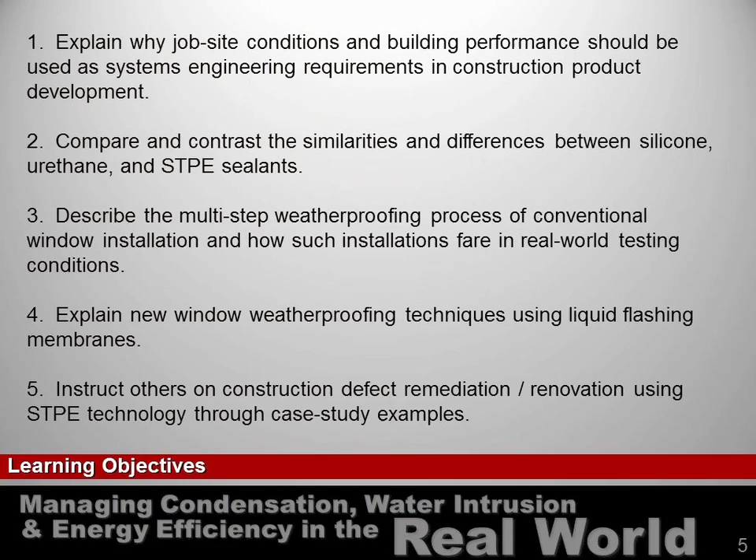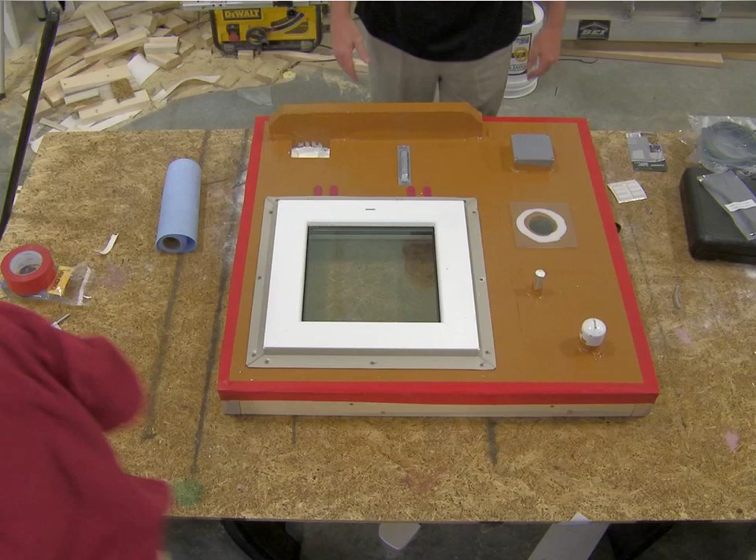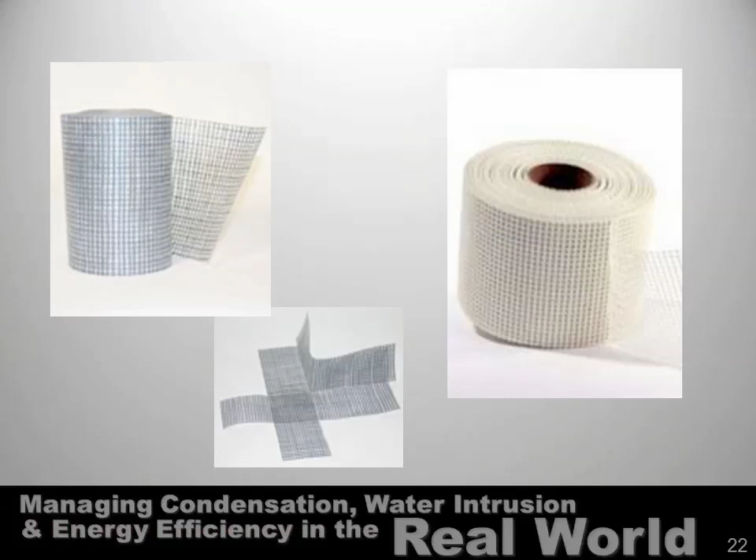As I was saying, the contractor in-house spreadable version has been in use since 2004. And by contractor in-house spreadable, I mean a contractor in the Pacific Northwest and now in the Southeast United States who for over 2 decades has made a good business as a self-performing general contractor, whole building repair specialist, repairing buildings that are 7, 6, 5, 4, 3 years old, slowly decladding them, repairing rotten OSB sheathing, repairing rotted rough opening, pulling windows, repairing the rough opening, reinstalling the windows, recladding the building.

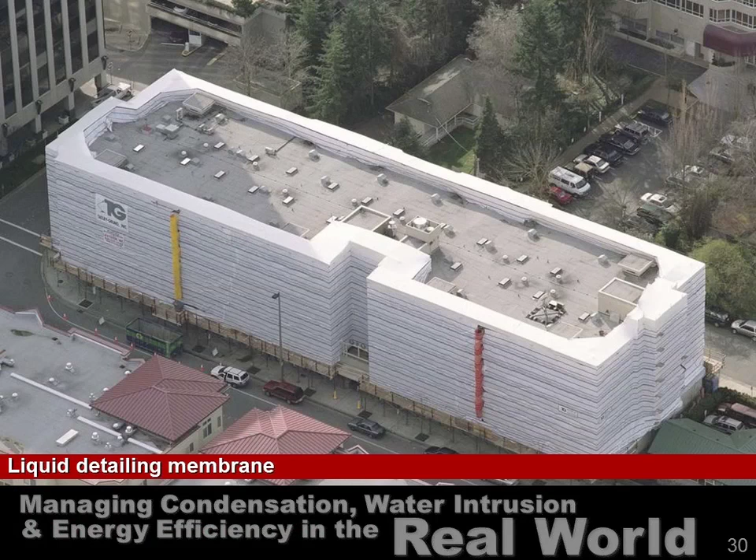And what they find when they pull the cladding typically is disintegrated building paper, corroded fasteners, decayed sheathing and structural members, and severely compromised peel and stick flashing membrane, there, as you see around the frame of that window.

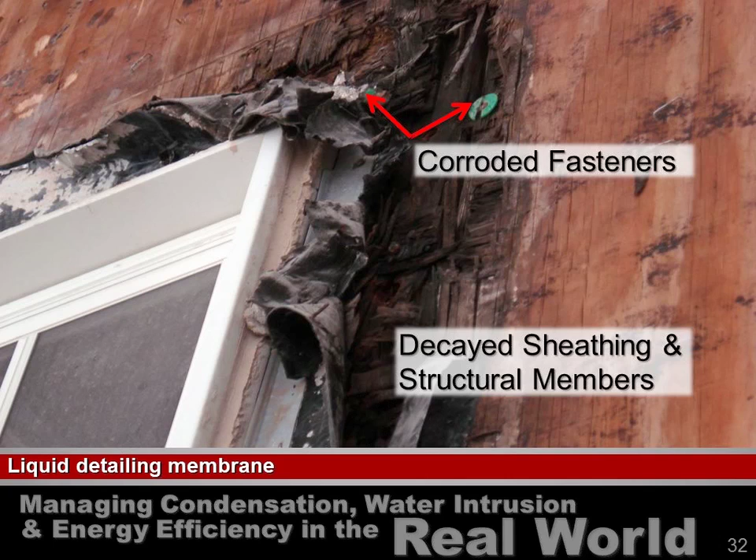After doing this for a couple of decades and testifying in over 85 lawsuits as expert witnesses as to the forensic causes of this damage, the remedial measures that would be necessary, and the costs, it occurred to them that they were replacing the same peel and stick and building wrap with more peel and stick and building wrap as they rebuilt these buildings. And they started to get uncomfortable that, as careful as they were, they might be the next victim, because they realized that $12 million, for example, in repair funds doesn't just fall out of the sky on a 3-year-old building.

It takes a cadre of lawyers, an 800-pound consultant like Simpson Gumpertz, a lawsuit, and a major settlement fund. They didn't want to be the next victim.

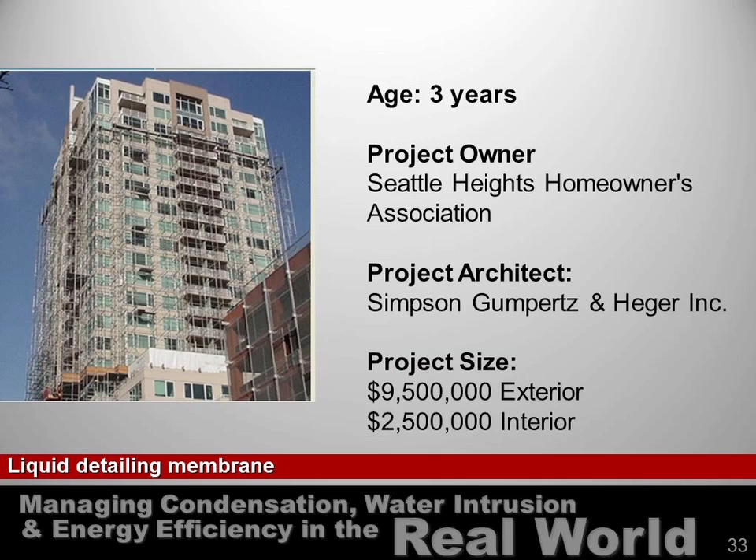So they set about to gather together all the building wrap materials and peel and stick materials on the market and test them. And they didn't want to test them to low levels, like the Energy Star standard at 50 pascals, or 20 miles an hour. They wanted to test them to something a little better than that, because they found on the 6th story of a condominium in Seattle, they got 105-mile-an-hour wind, 125-mile-an-hour wind during a rainstorm.

So they went to the testing companies to see what kind of test rigs they had, and they soon realized that what they were seeing was not going to stand up to that kind of testing.

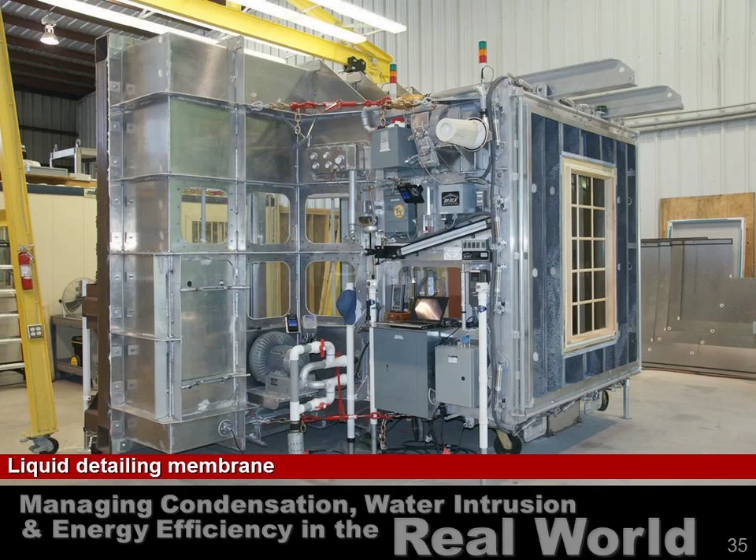It happened that one of the principals in a prior life was a designer and fabricator of search and rescue vessels for the Coast Guard in the Pacific Northwest. He said, 'I'll build me a test chamber.' He put that design and fabrication ability to work to do that.

He combined a third element, and that is a passion for measurement. Growing up in a construction family, ever since he was a small boy, he can remember his father telling him straight, plumb, square, and level. And the vendor of all that equipment has told us that it's the most highly instrumented facility of its kind in the United States, including the air leakage testing equipment that automakers use to test their windshields.

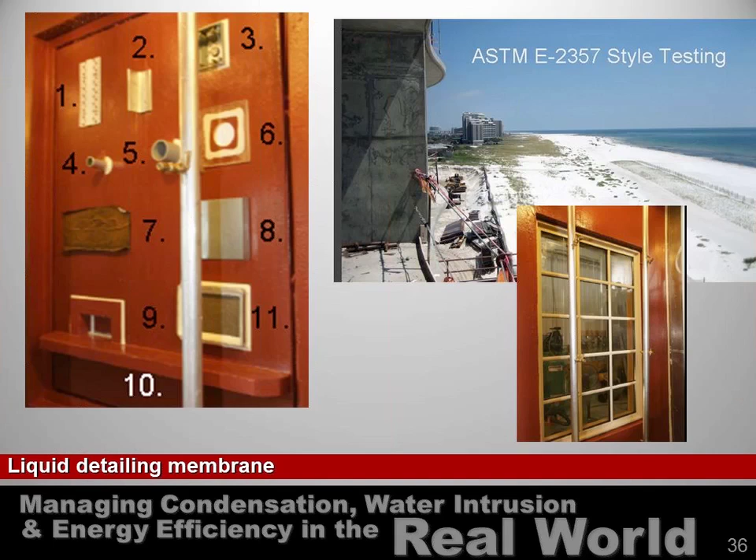to perform a wide range of air leakage and water intrusion testing. And they do it on an iterative basis. Test, determine the failure level, determine the location of the failure and the mode of failure. Evaluate materials and methodologies and details. Adjust.

Well, when I went to visit these folks initially, it was like most business trips. Started out with an airplane flight, going to end up with an airplane flight, and I was late for my flight. So I said, well, this is an impressive machine, but I sat on the technical committee of the Air Barrier Association of America.

And to pass that regime, you got to show pretty much zero air leakage at 75 pascals of pressure. So if you don't mind, I'd like to just cut to the chase, and would you please tell me whether these chambers will perform to that standard in these products that you've developed.

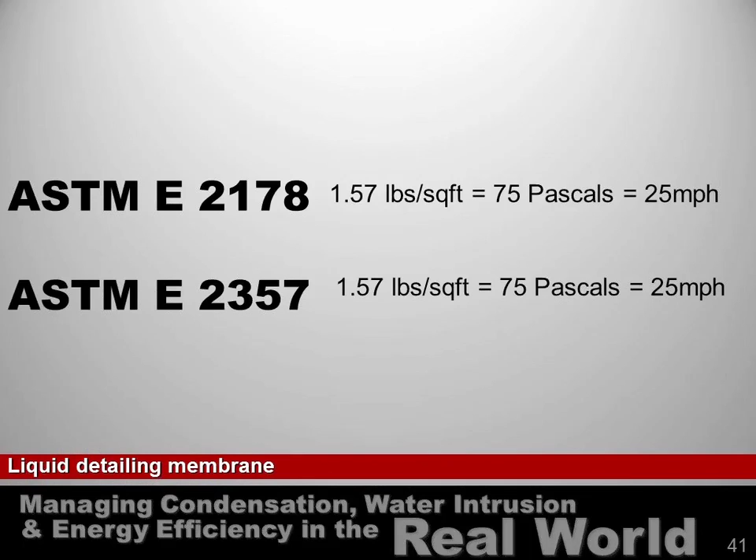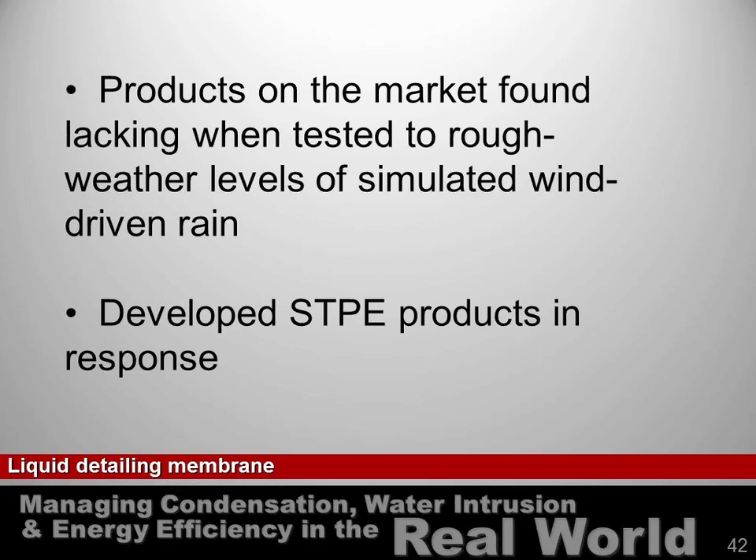And the fellow explained to me, he said, you know, we tested everything we could find, and they wouldn't perform in these chambers the way we wanted them to. And that's why we developed these products. He said, because the kind of products we're after and the kind of testing we're doing is not 75 pascals corresponding to 25-mile-an-hour wind. We go to 40 times that, about 2,900 pascals, corresponding to 155-mile-an-hour wind-driven rain, Category 5 hurricane.

I looked at my shoes. I said, I think that'll do.

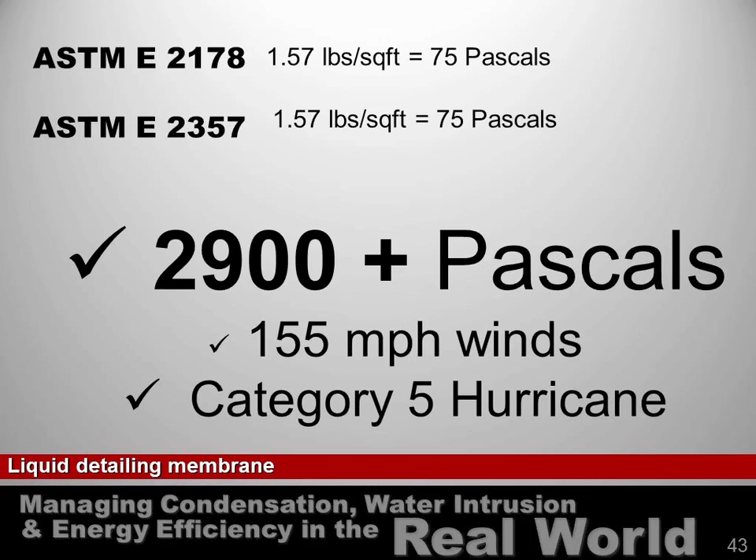Now, how do these guys come up with these products? Well, they employed a process called systems engineering. I'm fairly confident they didn't know they were performing systems engineering when they did it. I just happened to be able to recognize it because I spent 10 years at a U.S. Department of Energy National Research and Development facility operated by Lockheed Martin Corporation, regarded as a champion of systems engineering.

That's why we have the very unconventional, highly performing stealth aircraft, totally unlike anything seen before them, that have made such a major contribution to our military.

Before I tell you what systems engineering is, let me give you a couple of hypothetical examples of what it's not. It is not hypothetically being in the business of manufacturing peel and stick roofing membrane or below grade foundation waterproofing, walking out into your factory one day and seeing all that equipment and personnel and raw materials and saying, hey, let's make a WRB for the backup wall out of this. That would not be systems engineering. Or if you're in the business of manufacturing spun polyolefin sheet packaging goods for the packaging industry, to walk out into your factory and say, let's make a building wrap out of this stuff. That would not be systems engineering.

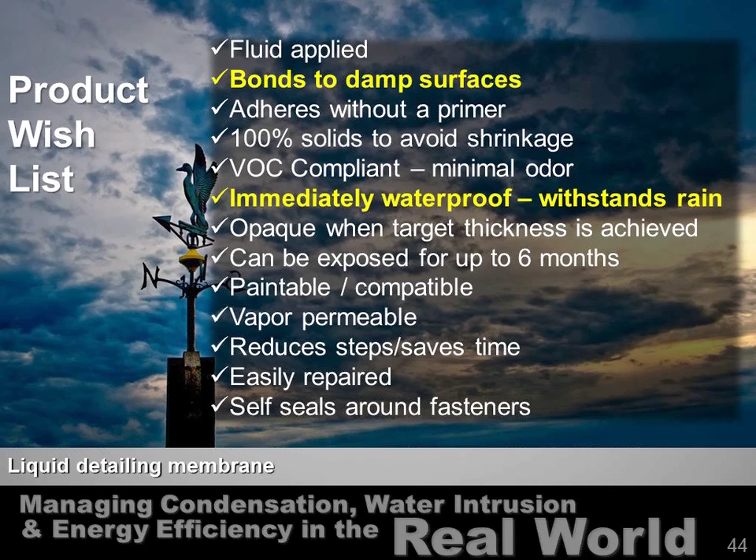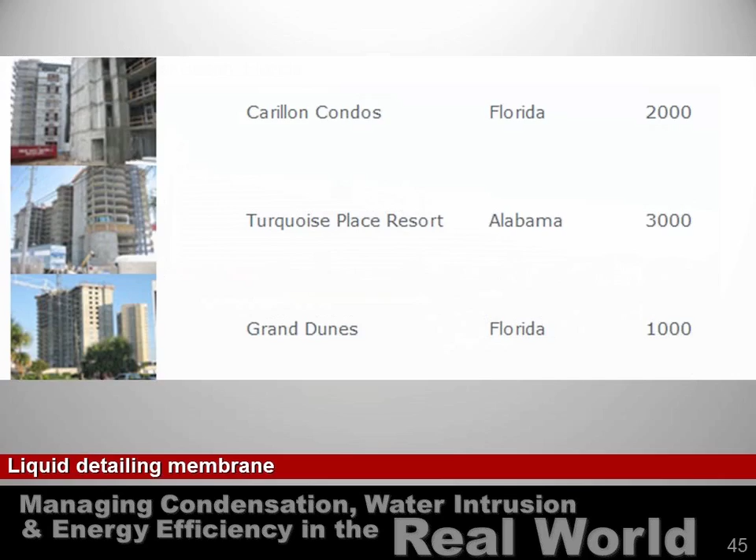And that's what these guys did. And that's why, initially, these products were specified by expert waterproofing consultants on coastal properties with up to 3,000 rough openings. Properties of such a high profile with such high profile clientele that failure was not an option. Not exactly your strip shopping centers.

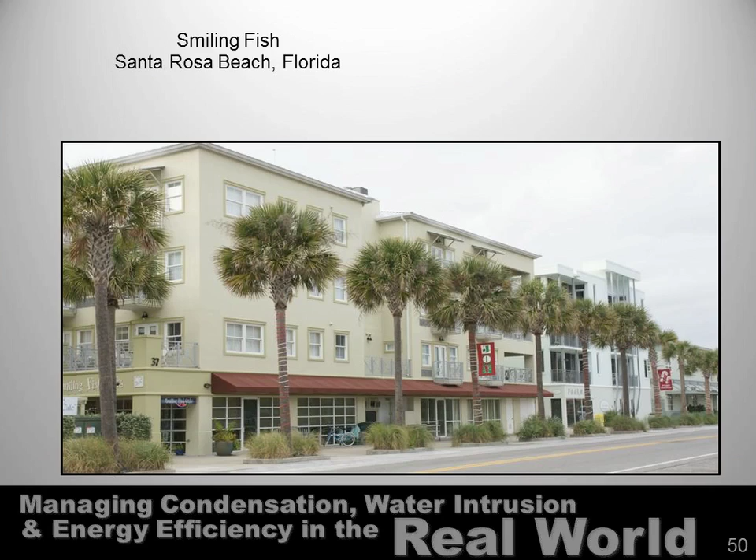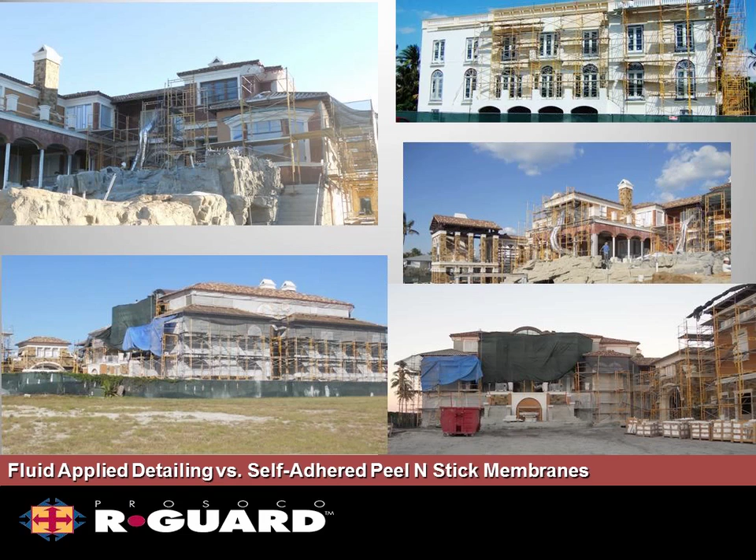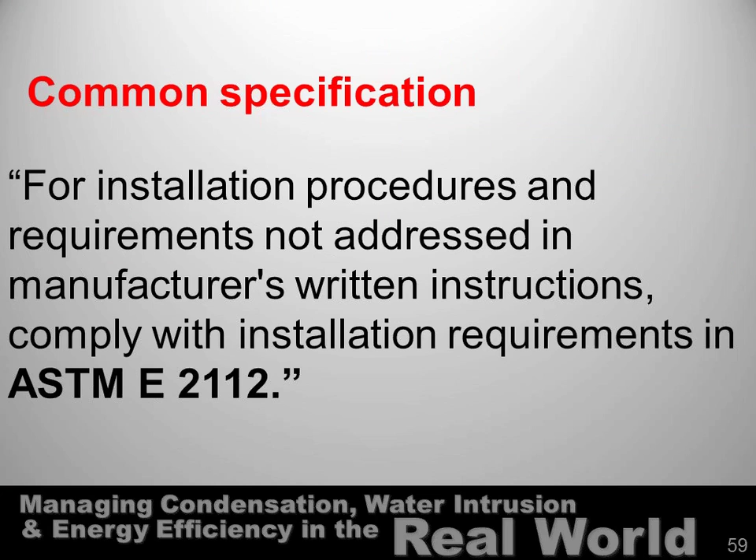Getting quite a bit of traction in residential as well, especially in Florida. Now, one thing you won't find in the specifications for any of those structures, and that is the national standard for the preparation of the window rough opening and the installation of windows.

ASTM E2112. You won't find that on those structures. What is ASTM E2112? It purports to be instructions for complete integration of the external wall components, indeed the holy grail of the construction industry. These guys have been doing that expertly for 20 years.

So they decided to put together this mock-up and test it. Now, I hope you get the impression that we go to some lengths so that these presentations are not tedious for the audience. We try to have a lot of slides, try to have something interesting to say.

And we'll break with that for a minute, because we like for designers in the audience to think for a moment what you're doing when you ask contractor employees to do painstaking, tedious, difficult, exacting work over and over and over again, and do it fast so somebody can make some money. Your less dedicated employees are going to cut corners every time, and even those that are dedicated are going to fall prey to human error.

Step 1, install sheet membrane into and below window opening. Step 2, install sheet metal tray. Install sheet membrane into window opening. Install shims. Install window. Install sheet metal head flashing. Install peel and stick from above substrate to head flashing.

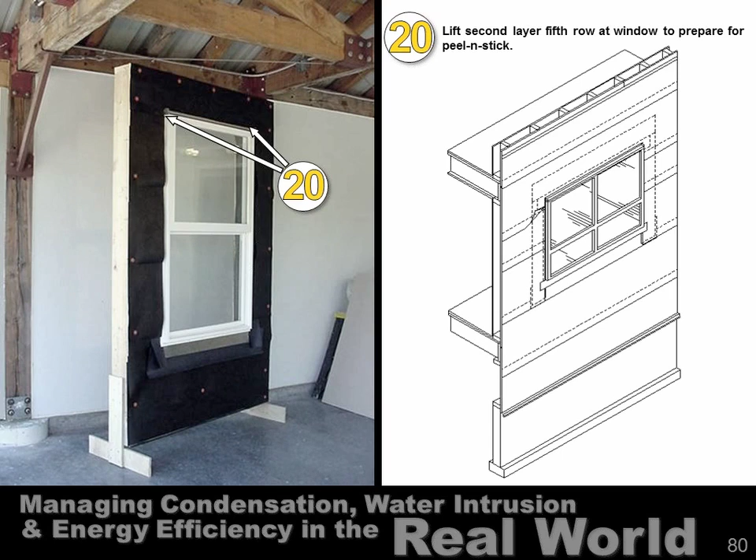Building installation paper with drip edge flashing. Building paper installation: first layer first row, first layer second row, first layer third row, first layer fourth row, first layer fifth row, second layer first row through second layer sixth row. Lift second layer fifth row at window to prepare for peel and stick. Install peel and stick as shown. I think that times the number of windows in your structure.

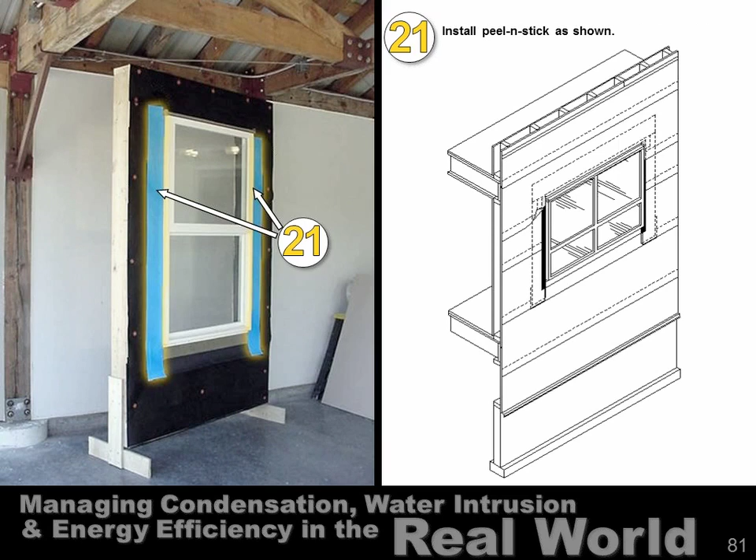So they put that together very painstakingly in strict accordance with ASTM E2112, and then they set about to test it in accordance with the window manufacturer's standard for a 55-mile-an-hour wind-driven rain.

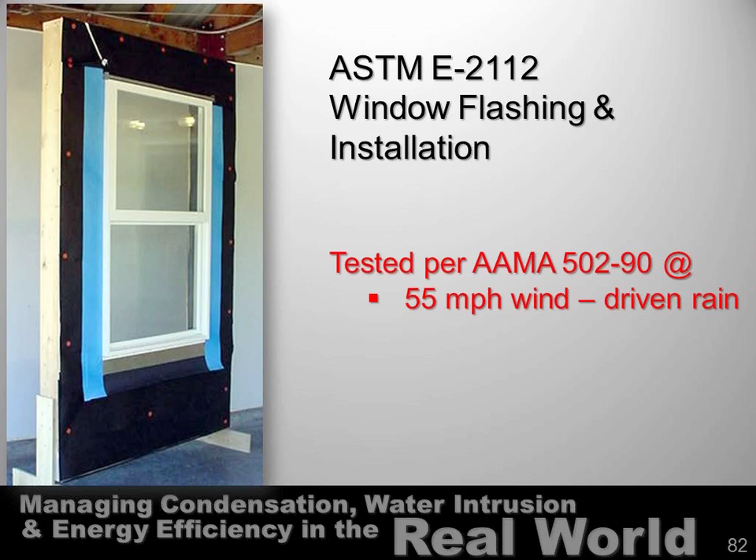Now, you all are technical people. You probably don't need to have this explained to you, but I'm not so technical, and I got to orient myself every time I show this slide. What you're looking at is a window installed in the side of the test chamber, and you are standing outside the test chamber. This is as if you are standing inside the building, looking at the inside of the window to see whether the rain's going to come in and get you. Likewise, if you open the door to the test chamber and go inside and look at the window, you're looking at the external face of the window where the weather would be.

All right. The first thing they do when they conduct this test is they go inside the test chamber and they take clear plastic polyethylene sheeting and they mask off the entire window, motioning from left to right, clear across the window expanse. Well, now, why do they do that?

They're afraid that the window is going to leak water into the rough opening. But that is not what they're trying to test.

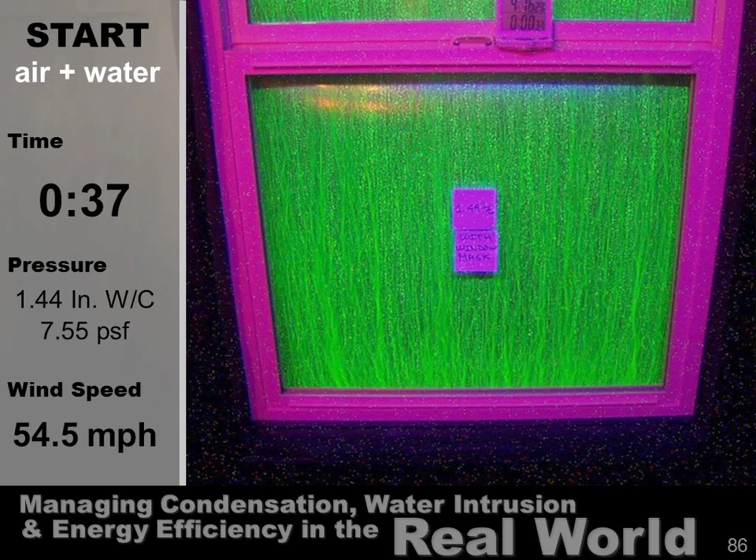What they're looking for is to see whether any green shows up on the outside of the pink or purple, because that means water is getting between the frame and the rough opening, and that the ASTM E2112 87-page national standard has failed. In 37 seconds, it has failed, and more so at 5 minutes—put together in strict accordance with the national standard, tested in accordance with the national standard for testing.

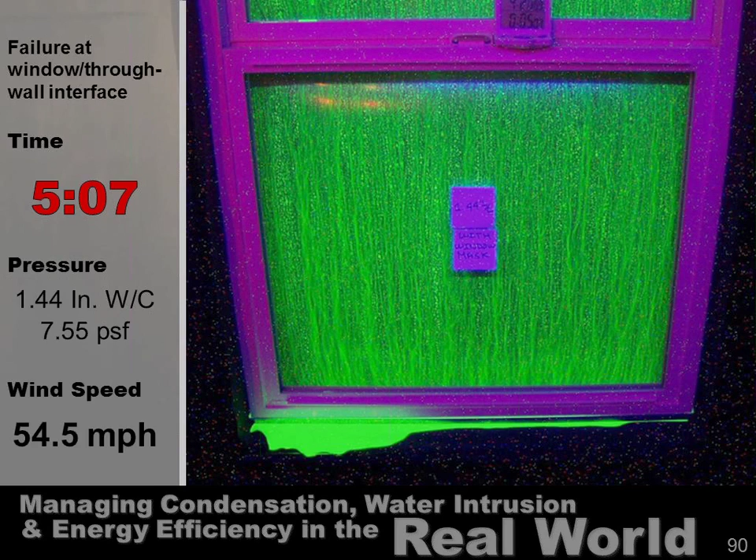I mentioned RCI previously, formerly Roof Consultants Institute, now doing water intrusion consulting on the whole building envelope. It's no surprise their monthly technical journal is called Interface, because they know it's at the interfaces of dissimilar materials and similar materials where materials fail and human error causes problems.

Now we're back to that mock-up again. I'm going to press this button, and this thing is going to count the number of interfaces in that 21-step process.

74. I was tempted to add something about trombones—you'd think I was a highly cultured individual.

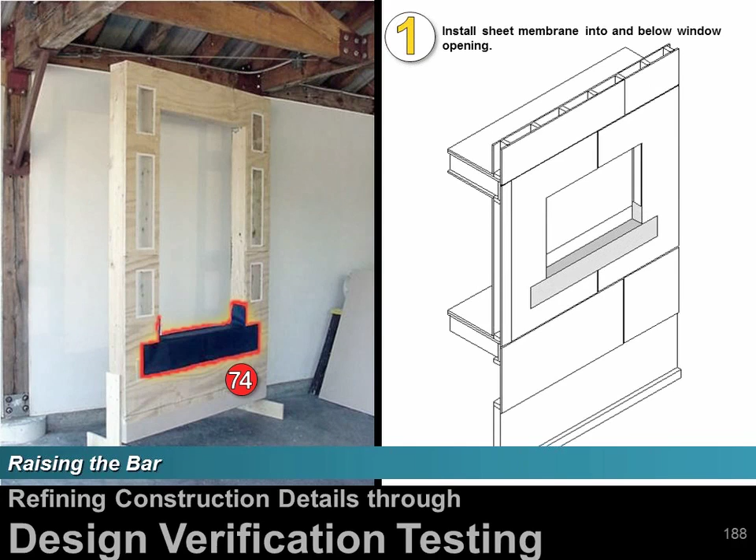What about ASTM E2112? Obviously difficult to properly install, and when you do properly install it, it leaks. And you know if it's leaking water, passive house, it's leaking air.

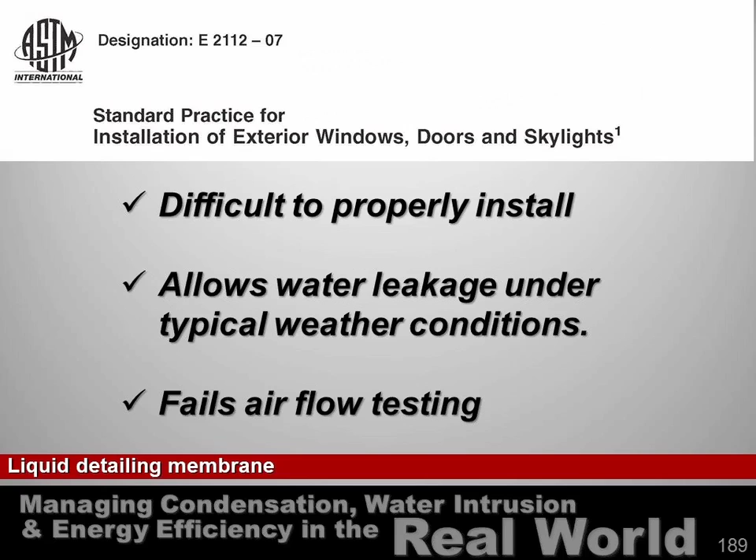Well, when I see something like that, I say, now wait a minute—I would like to see some corroborating evidence. Thank you very much. These guys built the mock-up, these guys built the test chamber, these guys are hustling the products. Is there anybody else that has called into question ASTM E2112?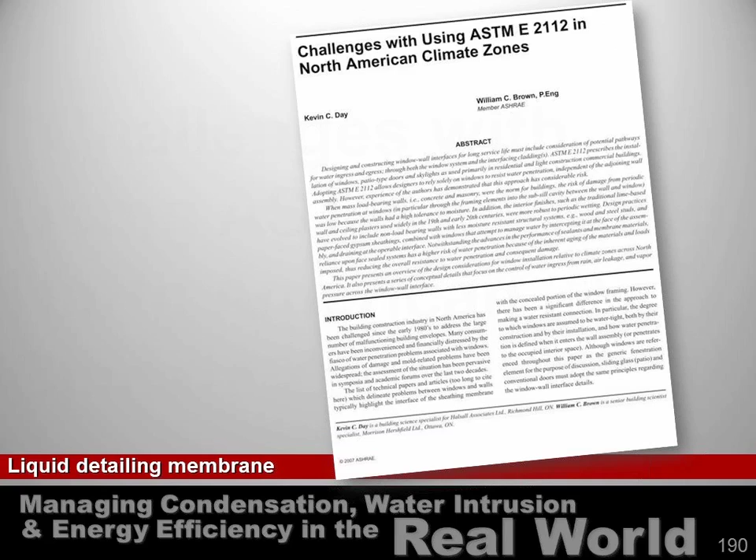How about a paper that says challenges with using ASTM E2112 in a North American climate zone? Dig further.

Some of you may remember Paul Newman, Robert Redford, Butch Cassidy and the Sundance Kid. And who are those guys? Who wrote that paper? Look into it—a couple of heavy-hitter consulting engineering firms, that's it.

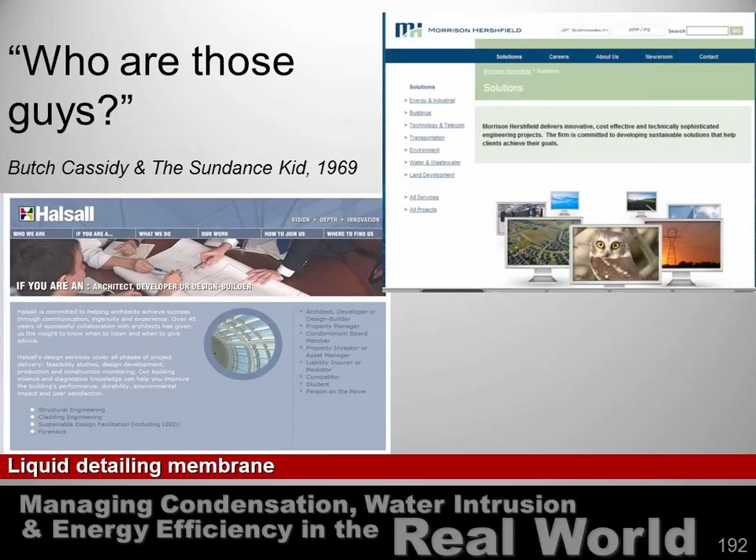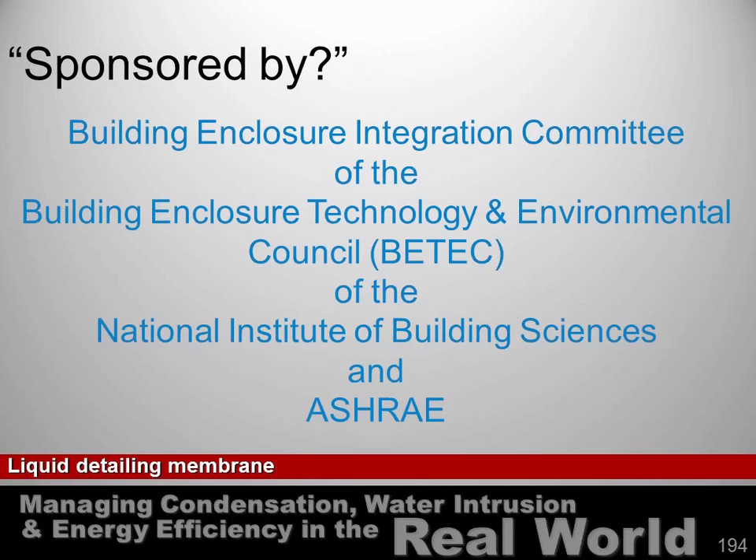What proceedings was it published in? Building Envelopes. Sponsored by whom? National Institute of Building Sciences and ASHRAE. Okay, I might read this paper. Coming out of Oak Ridge National Lab, a well-known building research program.

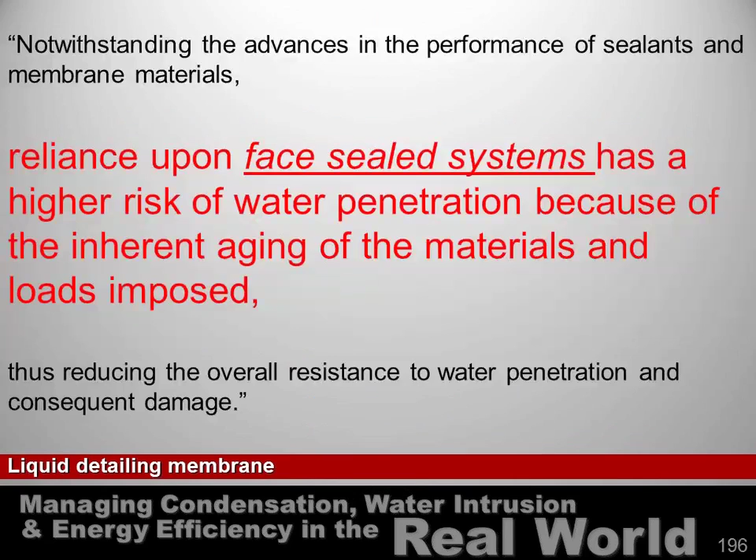What's the paper say? Reliance upon face sealed systems, i.e. peel and stick, has a higher risk of water penetration because of the inherent aging of the materials. Remember the photographs where I tore the cladding off and showed you what was behind there—thus reducing the overall resistance to water penetration and consequent damage. Conclusion: windows may leak. Guess these guys aren't making that up.

Secondary protection of the window opening is required. It's not enough to put peel and stick on the outside and assume that the water's not going to get to the rough opening.

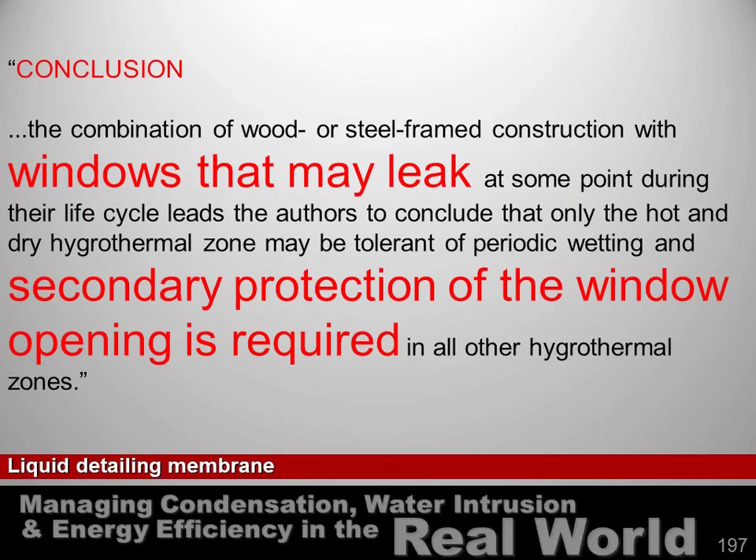They enumerate, not by way of requirement but by way of enumeration, the typical systems for protecting the rough opening in existence at the time that was drafted.

They mention that whatever you use, put discontinuities in the sill. Leave a gap. Water accumulates in the sill area because of gravity. Let it get out, draining down the wall into the flashing system out on the sidewalk.

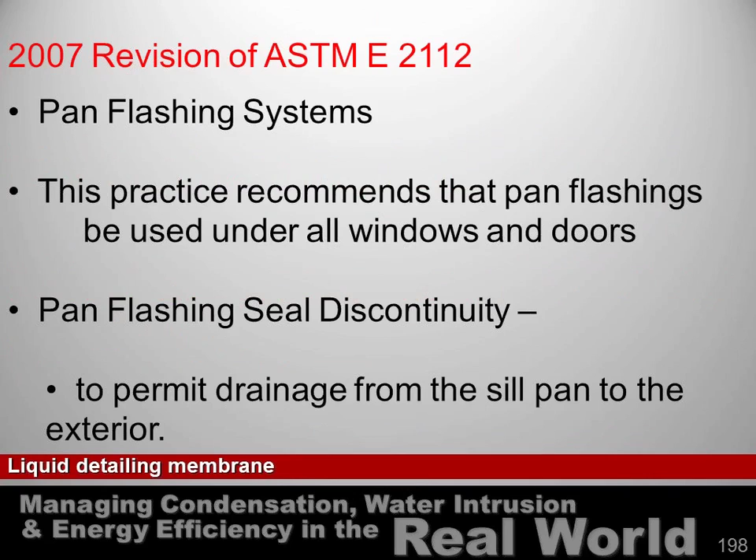The types that they enumerate: metal, plastic, composite, self-adhered. Frankly, I bet folks in this room and out in the audience know a lot more about the pitfalls of these systems than I do. But let me look at some of the notes I took from this contractor.

Metal pan flashing. The standard allows you to either weld the corners or use sealant to glue them together. Don't glue them, it doesn't work. Welding's expensive. Then to install them, in the sill area where that pan is, you take a screw and drill it through the pan into the sill. Well, that's the area where you're trying to introduce continuity.

And here you are driving holes in it. Now, you can take your tape measure and measure out a spot on the sill before you put the pan down, put a glob of sealant down, then put the pan down, then measure where that glob is. I'm sure that's done a lot, and no wonder the contractor says that's problematic, getting that to work.

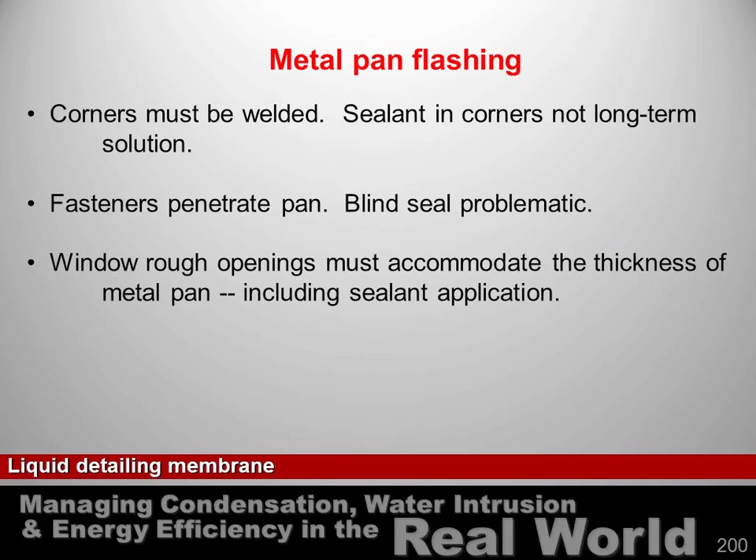And apparently there's an ongoing war between specifiers and framers and window installers about what size that rough opening is going to be and whether the window's going to fit in. When you go sticking a bunch of metal in there, it gets even worse.

Costs a lot of money. Custom fabrication requires a high skill level, which unfortunately we're not having as much of as we used to. And I challenge anyone to go to section 5.16.8 and read it any other way than to say, if it ever gets cold where you are, don't use metal flashing.

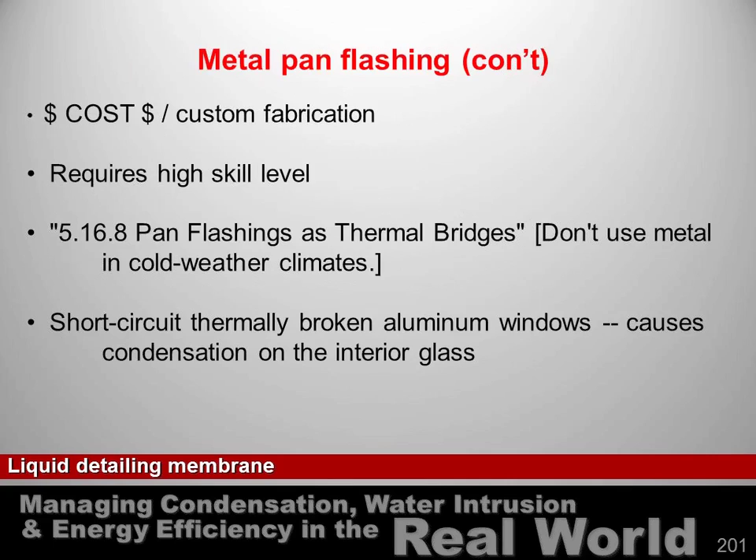What about peel and stick to create this pan flashing in the sill area? Well, to get that to work right, you end up with these folds or tents, agglomerations of material in the corner. So the fellow installing that finishes, and then the window installer comes along and says, 'That ain't gonna work,' takes out a knife and whacks it out.

There goes your waterproofing and your air leakage protection. What's left has bridges, fish mouths, and importantly, that material is vapor barrier material.

Take a towel, hang it out on the line, it'll dry. My mother taught me that. Take a towel, sopping wet, put it in a garbage bag, seal it up, hang it out on the line, come back in 2 weeks, it'll be sopping wet.

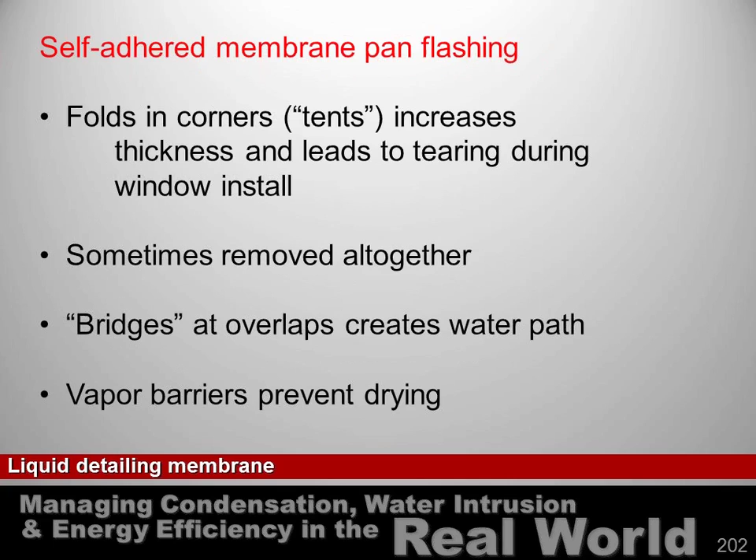That's what a vapor barrier does for you. Put a vapor barrier on OSB that gets wetted during construction, because guess what? It rains during construction. About half the damage these guys see comes from rot, from the failure to dry. The other half from water intrusion.

Well, how do you make a pan flashing in the sill area out of peel and stick material? A little cartoon for that. A little training unit that these guys used to use.

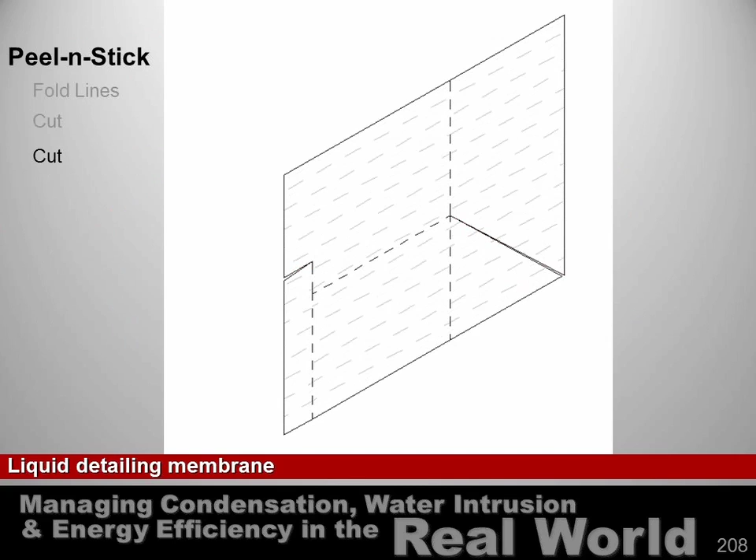Cutting and folding, folding and cutting, cutting and folding.

You know, every Christmas I buy my wife a piece of jewelry, and I go to the Hallmark store and get a pretty bag, and I put the little jewelry box in the bag, and I get the lady to sell me some tissue, and she always wants to sell the whole package and yells at me because I only want 2 sheets. I poke the sheets down in there, put a card in there, and put it under the tree. But I gave up on wrapping Christmas packages a long time ago. This is way above my pay grade here.

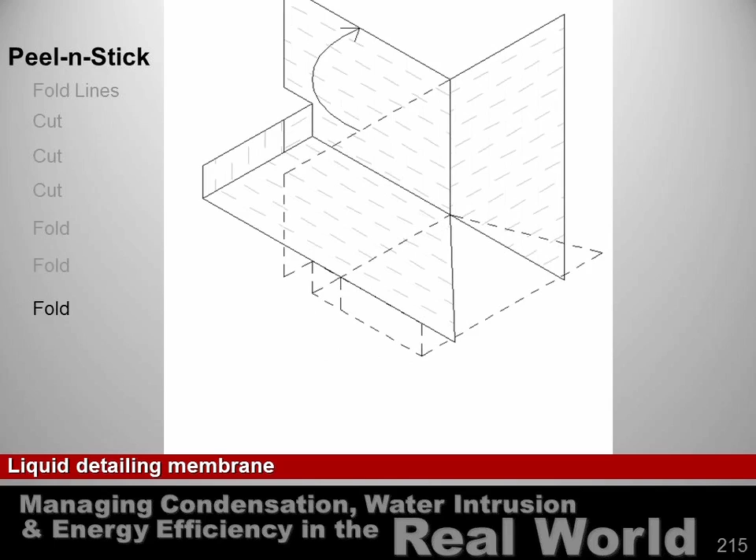Imagine doing that over and over, and so forth, with the 21 steps and 74 interfaces.

Contrast that with a fluid applied system. Gun it out of the cartridge, knock it down with this high-tech piece of equipment here. Looks like it's called a Bondo blade. Looks like something you would knock the frost off your windshield with.

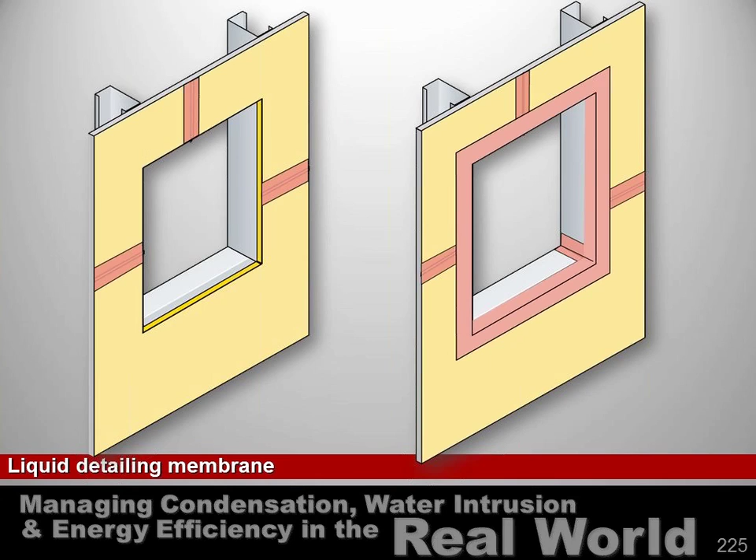Come along with a joint and seam filling material. Come along with the same chemistry optimized for waterproofing. Gun it down, knock it down. You're done. No 21 steps, no 74 interfaces. The most vulnerable part of the building envelope, where 98% of the leakage occurs and the problems develop, is now a waterproof box.

Come along with your spray applied or roller applied WRB/air barrier coating on the field of the wall. Again, you have no seams to tape, no lapping to worry about, no fasteners, penetrations.

Take a conventional sealant formulation of that same STPE chemistry that formed that waterproof box, put an interior air and water seal around the interior perimeter of that window. This system's designed on the assumption that the window leaks. I wonder why that would be designed that way.

So if any water gets forced into the rough opening from the sheathing wall, or if the window leaks into the rough opening, the water hits waterproofing material, the red material. If there's a lot of it, it backs up against the front side of that waterproofing sealant and it goes out, through the discontinuities or weeps that we showed in the sill area.

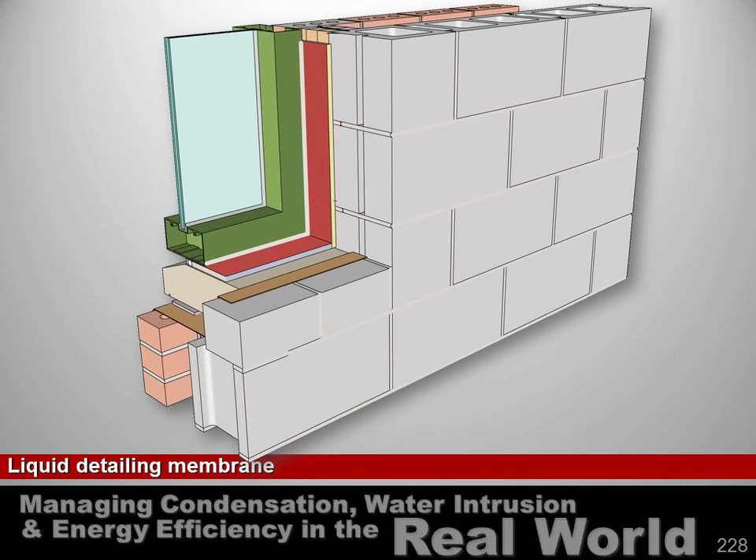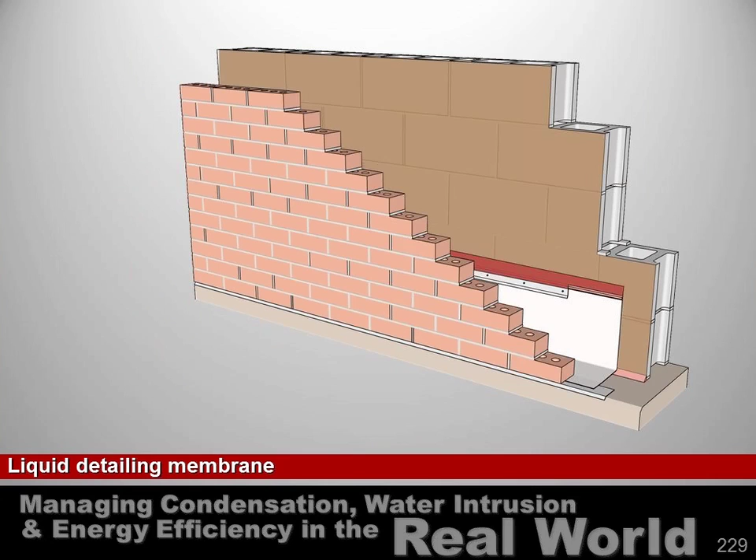Through-wall flashing material, when contractors and specifiers, designers see this material, they think of all kinds of applications. Some of the more typical ones are the installation of through-wall flashing at the base of the wall, this metal flashing here. Take a bead with a joint and seam filler, fill that critical material to backstop this material. Take a bead of the joint and seam filler over the term bar on the top, counter flash it with the red waterproofing material. Same way with through-wall flashing in the spandrel condition.

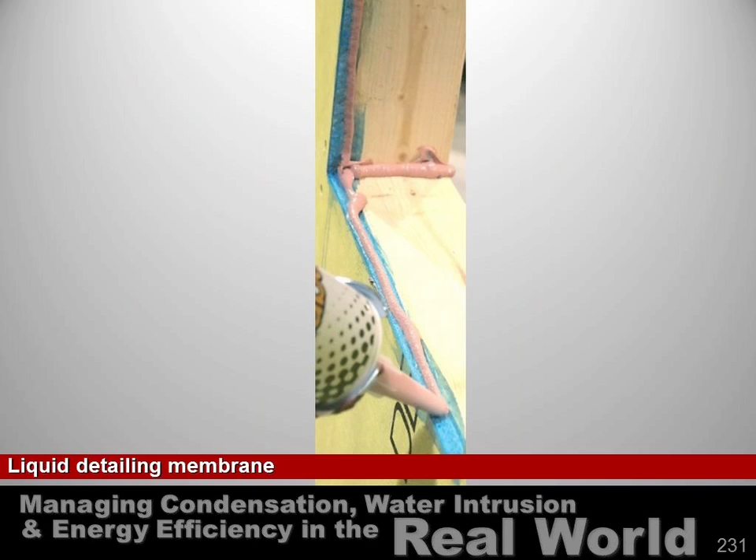Here's some photographs, just to give you a quick idea that this is all about as easy as it looks in graphic form.

Here the pink joint and seam material has been gunned out and knocked down. Now they're coming back over it 10 or 15 minutes later with the material optimized for waterproofing.

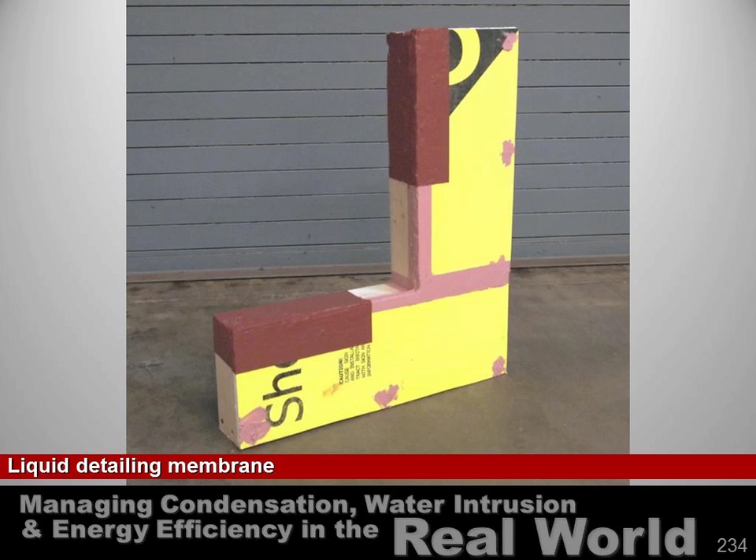This is a mock-up. In fact, we've got one here with us. This is an example of what it can look like out on the job site. It doesn't have to be pretty.

Here out on the field of the wall, below the sill area, and to the right of the rough opening, we've got a WRB or air barrier of the same chemistry that's rolled on.

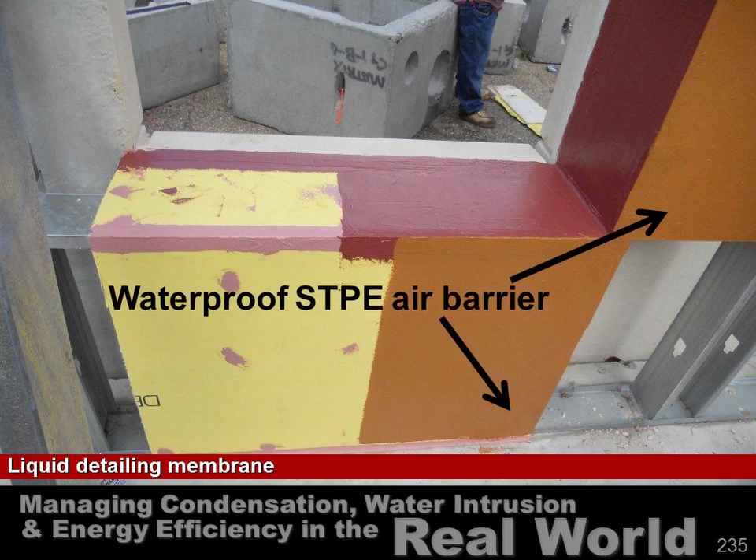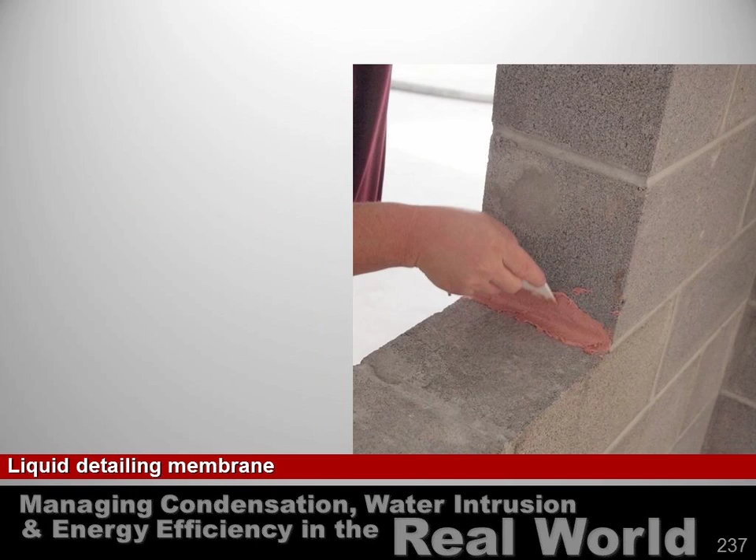CMU is about the same, except you have really no joints or seams in the rough opening, but we do take the joint and seam filler in the corners because we tend to have some cracking of the CMU under there, so proactively deal with that. And come across with the waterproofing material, again rolling on the WRB/air barrier.

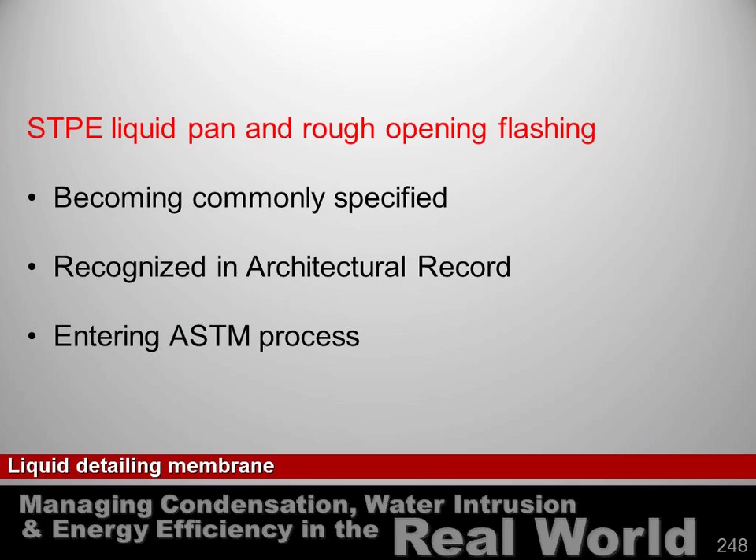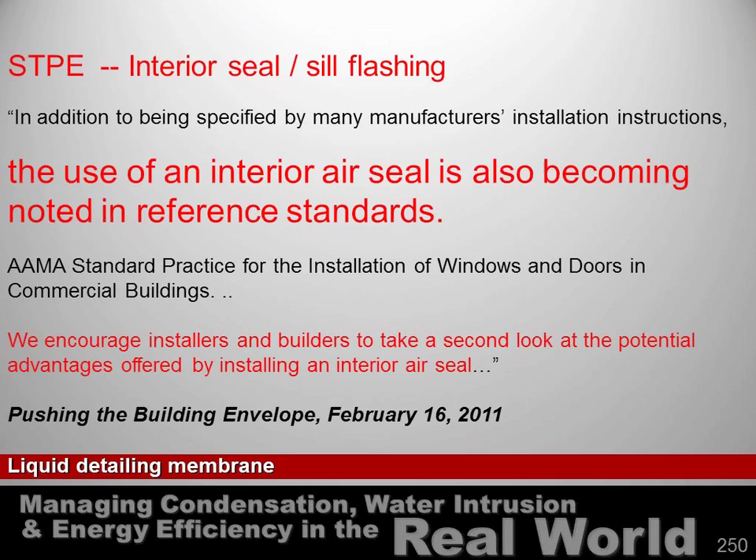Who is this guy? I understand he's been around for a long time, very highly respected in his field. And the window manufacturers, apparently these guys are a little ahead of their time, because now the window manufacturers say, guess what, use backer rod, as this system uses too, and sealant around the interior perimeter of the window.

All right, earlier in the presentation I said I'd come back to the chemistry a little bit, and we won't dwell on this too long.

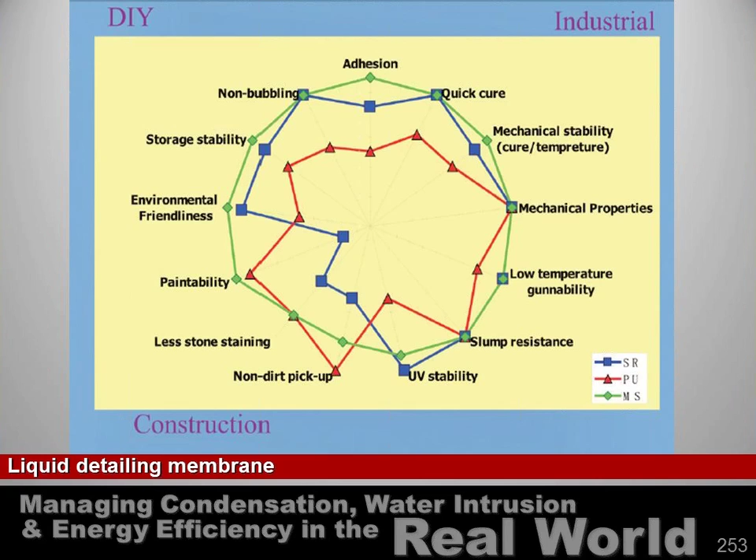Now suppose when the Japanese come over here and they see the different means we have to communicate with each other, they might be a little bit taken aback, as you might be looking at this graphic that they put together. But what they're trying to say here is that the green material, which is the STPE, has the initial MS here because this is sometimes referred to as modified silicone, that it bounds the blue silicone and the red polyurethane, bounds it, outperforms it in terms of performance on a number of different factors, as much as we saw in that table previously. And likewise with workability.

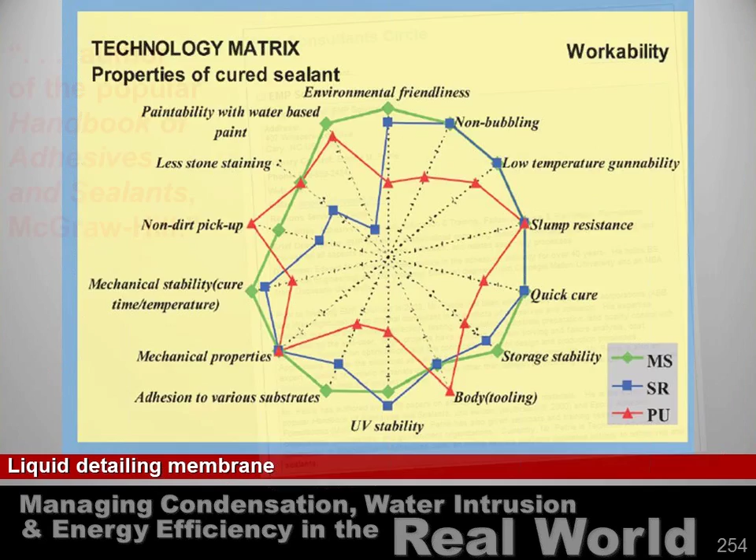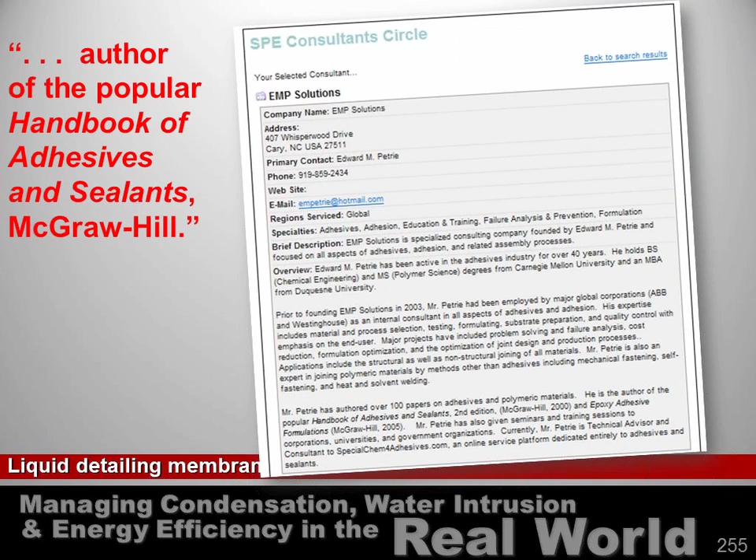Now, a little closer to home, here is a paper by the author of the McGraw-Hill Adhesives and Sealants Handbook. Here's his resume, and the paper he put together that was published by the Adhesives and Sealants Council. And there's that graph again, that table I showed you earlier, that hopefully now has a little better context.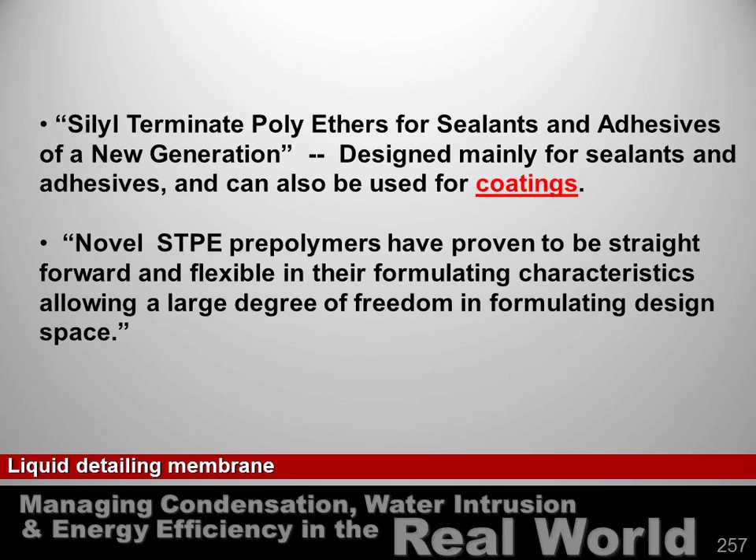And here's a couple of blurbs from vendors of the sealant resin, saying in their own complicated way that the product is readily amenable to being used as a coating.

Now, specifiers seeing this kind of performance say, what is this going to do to the cost of my project? Well, that all has to do with the contractor and who bids it, so we don't get into labor here. I'll give you some material costs.

Before I do that, I want to give you a data point: all over the country, contractors are going to their specifiers on ongoing projects and begging that these materials be substituted for peel and stick and building wrap. Contractors don't make requests so they can increase the cost of their project—they know they can make money using this. One of them, for example, does a lot of dormitories in Alabama, and says he can do 3 or 4 windows with this material for every one he has to peel and stick.

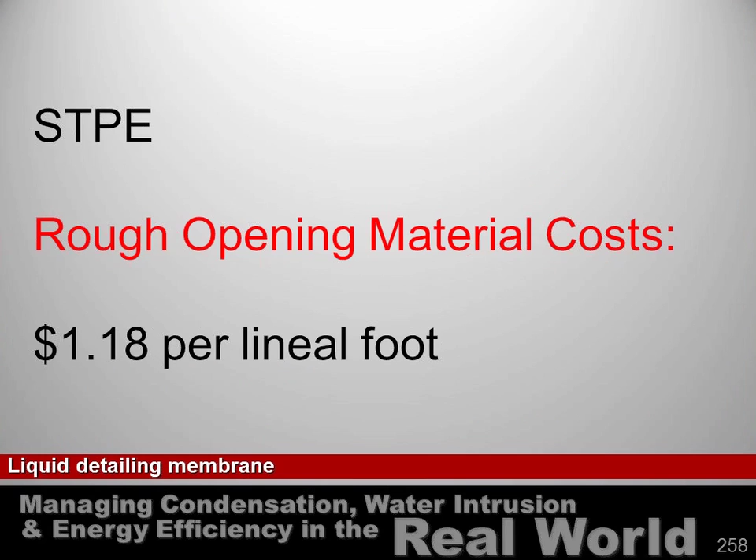For the rough opening, where you use the joint and seam filling material and the waterproofing material in tandem, you're looking at about $1.18 per linear foot. To use the high-performing STPE air barrier out on the field of the wall, you're looking at about 80 cents a square foot.

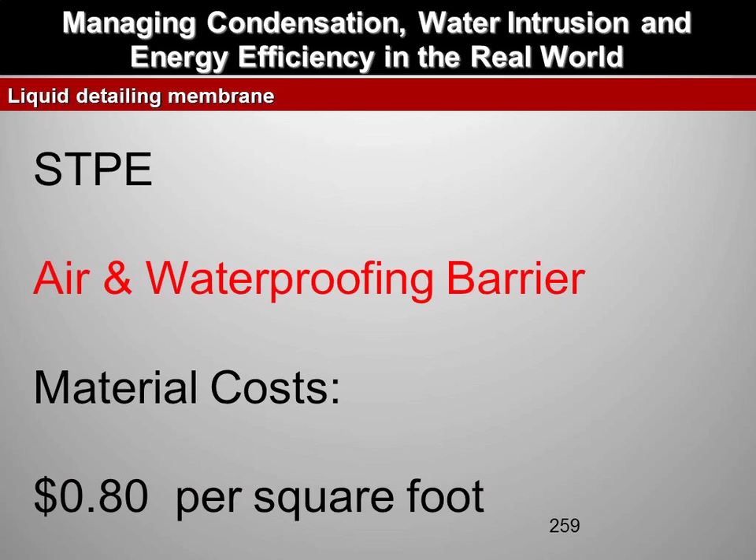There are also available acrylic emulsion products that have been approved by the International Code Council Evaluation Service as a water-resistant barrier substitute for building wrap. Not quite as waterproof, but sprayable rather than rollable, and somewhat less expensive.

Well, I'm going to close up now with a couple of case studies. The first one is a remediation situation. This involved an assisted living facility, but it's actually a full-blown elder care facility—it occupies an entire city block in a major city in Iowa, such as Iowa has a major city. It's everything from assisted living all up to full-blown nursing home care.

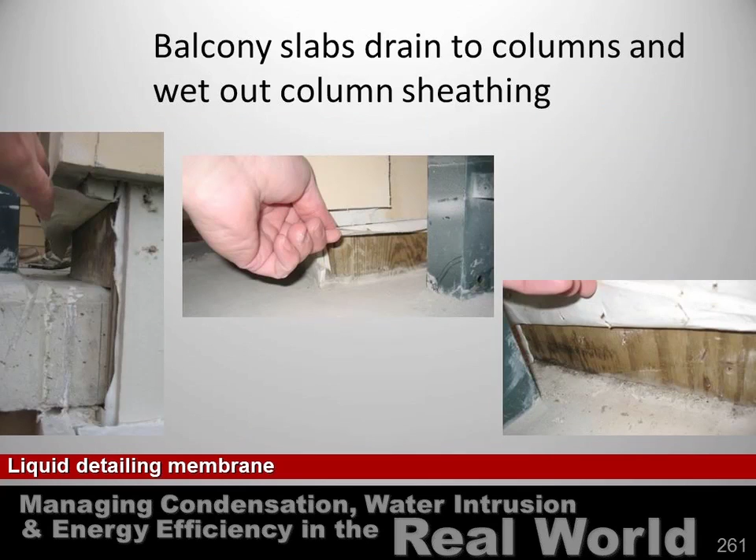And I didn't know what to do. I had an iPhone, so I took some photographs and emailed them back to the consultant we have on staff—a former waterproofing consultant with one of the major consultants, also a major player in the development of these products. I said, 'What do I do?'

He printed them out, as he does, marked them up, emailed them back to me, called me back, and put the iPhone on speaker. We had ourselves a job site meeting between Iowa and Florida.

He said, 'You got to disconnect that sheathing from that slab, far left corner. Cut that out.' Then he said, 'You got to take that siding off the face of the slab and cut that sheathing out.'

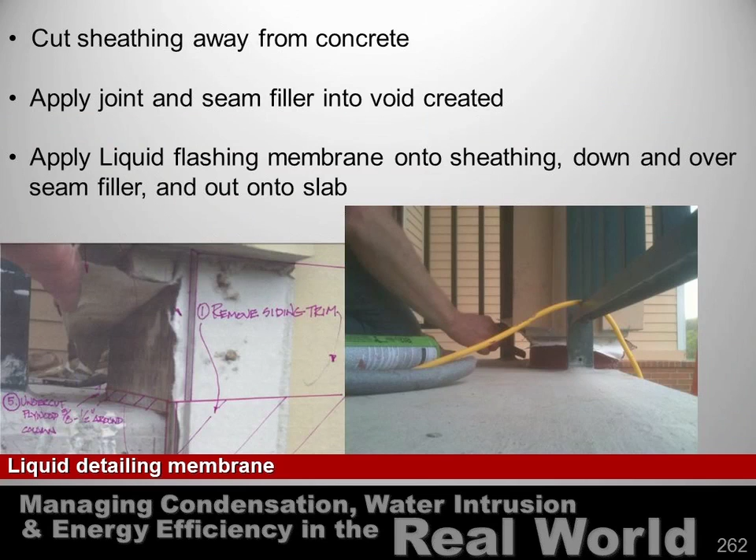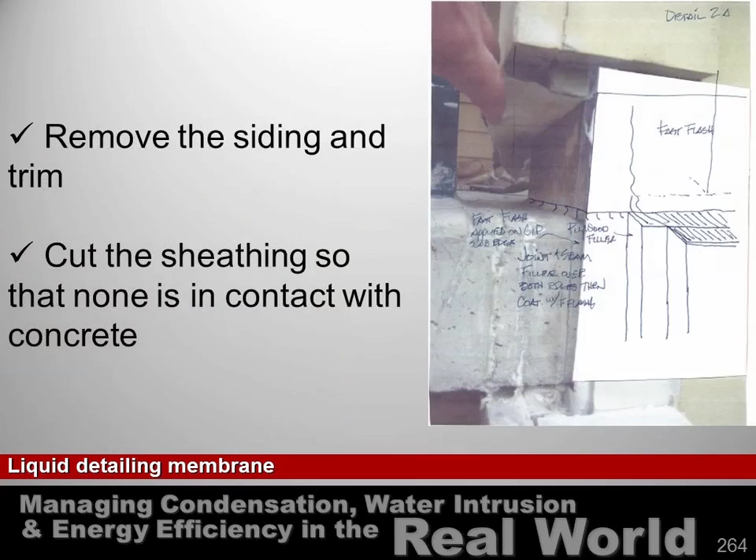And they told us how we would proceed to use the products that I'll talk about. But I want to back up here and talk for a minute about that siding on the face of that slab.

If the general contractor had a problem before he showed up there, he had a bigger problem when that siding got popped off. Very awkward, silent moment. Because that happened to be where there was a lap in the underlying building paper. I told you to put that in there in a shingle fashion, top over the bottom, because it was reverse flashed.

Now, for a long time, I could never remember what reverse flash meant. Every time we'd be in a meeting at my company and someone would mention it, I would cringe silently, hoping no one would ask me to explain what it was. The president of our company, a sensitive individual trained as an architect and our technical director for 18 years, got irritated with me one day noticing I was cringing about not knowing what reverse flashing was. He said, 'Paul, just remember this: you don't want to stick your raincoat in your underwear.' And hence I have never forgotten what reverse flashing is.

It means you have taken the upper course of material and stuck it behind the lower course, which means, if I get this right, you started at the top instead of the bottom. You've got to start at the bottom and work to the top.

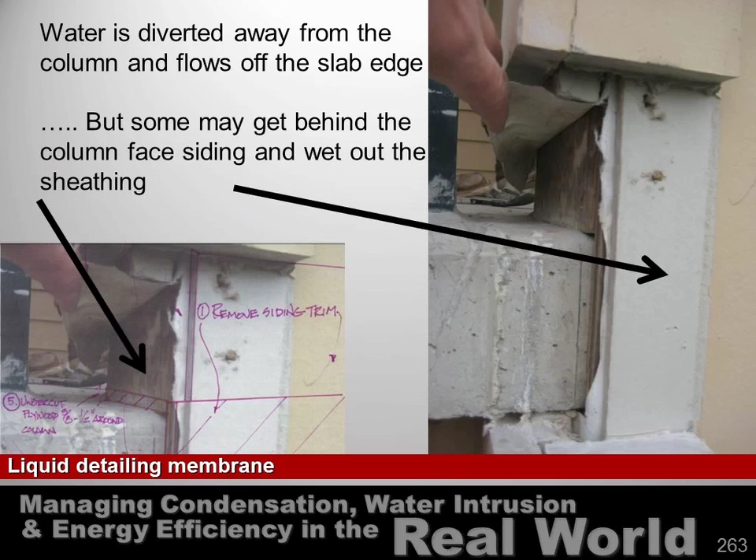All right, the GC brought with him a subcontractor who'd never been on a project before, never seen the products before. I didn't want to work with him, so I handed it to him.

The instructions we got were to take the joint seam filling material and put it, guess where? On the joints of the seams, far left-hand side. It doesn't go on the edge of the slab because guess what? There's no joint or seam there. Then take the waterproofing material, go over the joint seam material and exposed slab, bring it out, center photograph down, bring it out onto the edge of that siding, creating sort of a liquid drip edge there.

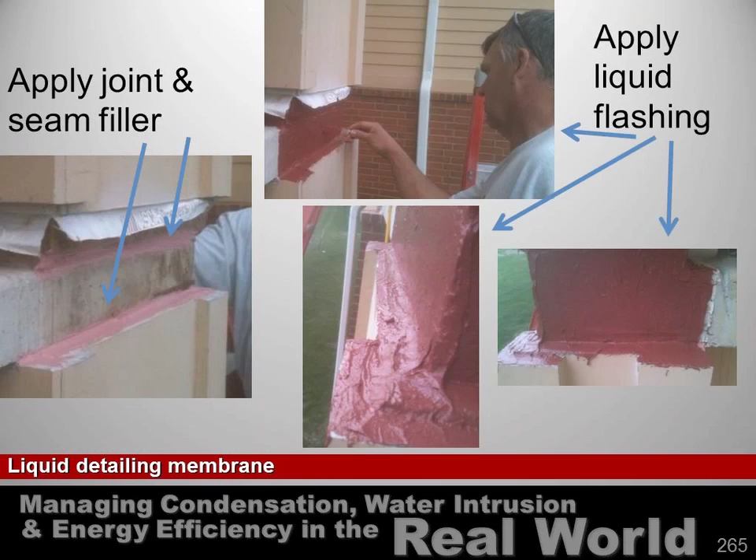Long story short, the building owner's consultant, who had hired a waterproofing consultant in Florida, saw these photographs, and I heard two weeks later that the entire project was being done this way. By the time we were leaving that day, the GC was looking a lot more friendly because he saw he was just going to save a whole lot of money, time, and trouble compared to the metal treatment. Like I said, the project went ahead and used it.

Here's another example — this is a renovation. What they're going to do here, you'll see at the top of this window, these are those old-timey windows like they had when I was in junior high school with the ropes on them. The plan here is to use the window frame as a rough opening for the installation of new windows. Okay, fine.

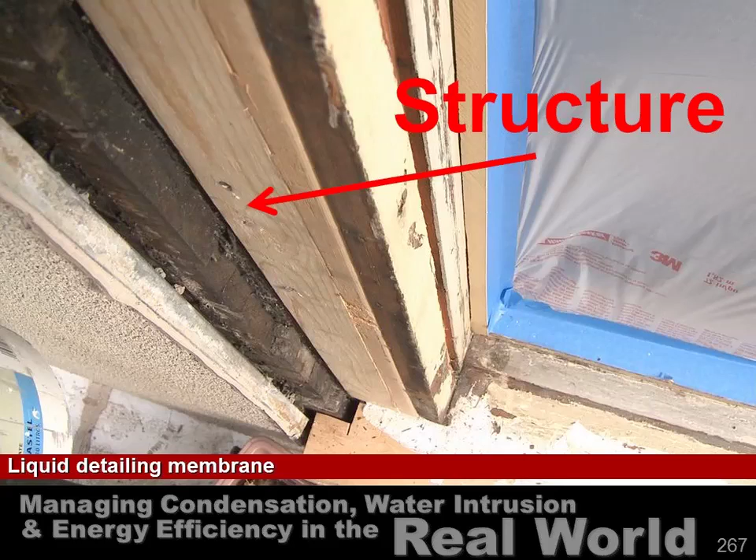However, this is a slide I use for internal training. If someone tells you that their peel and stick waterproofing membrane or sheet wrap or whatever is going to bridge over some airspace, like a piece of plywood is supposed to, and provide structure to your building, ask them what they're smoking. Because no waterproofing material — sheet good, peel and stick, fluid applied — provides structure. It goes on structure, it waterproofs structure, it doesn't create structure. So if you've got a hole big enough that shows a lack of structure, you've got to put something in there.

I had a situation at a soccer stadium in Kansas City. He took me out on the job site and showed me a space where, between the door opening and the next stud, there was about 3 inches. The sheathing was on the stud, about a 3-inch hole there. How do I waterproof that? Put a wall in there.

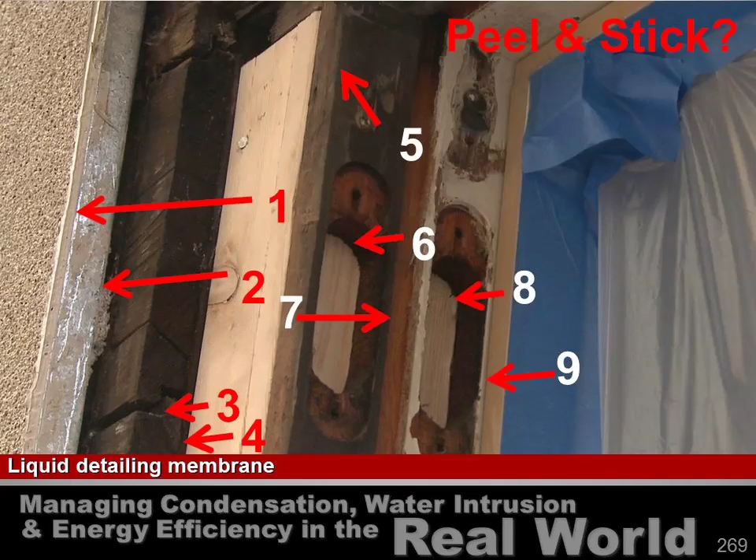So what were they left with? Look at all the stair steppings you've got to get from the inside to the outside. How are you going to do that with peel and stick? I counted them and pointed them out for you. You've got to bend and fold and press and stick that material and try to get it to go all those places. Impossible. Joint seam filling material, you gun it out, knock it down. Go back over it with the waterproofing material, gun it out, knock it down. And that's all she wrote.

Now, it's Saturday, and I appreciate you all coming out. I've got a plane ride ahead of me later this afternoon, so I'm not in a hurry, but the first thing I want to do is get out of the spotlight, sit down, and not be under all this stress.

However, what I find is as soon as I do that, the hands shoot up. Now, some of you look like you might be childbearing age, and if you go to parenting class, you'll hear these days that it's inappropriate to count to 5 with your children. They don't allow that anymore. But it works great with architects and contractors. So I'm going to count to 5. You've got to gird up your courage. You're going to ask a question, you're going to have to ask it now. And then I'm going to sit down and be unavailable.

Permeability is an absolute must. If you go to our website, you'll see that we do sell a vapor barrier, only because the president and I caved in after years of pressure from our sales force, because there are some specifiers out there that just insist. Vapor permeable is what you want, and everything I'm showing you here, and everything on this mock-up except the little bitty corner on this back side, is vapor permeable. Extremely important—it avoids condensation in the wintertime, allows water vapor to get out of the building, and allows drying. Remember the garbage sack and the towel.